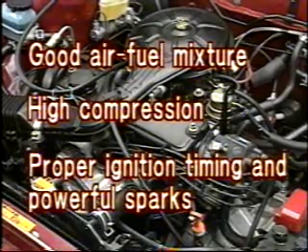Preconditions must be met for a gasoline internal combustion engine to run at maximum efficiency. There must be a good air-fuel mixture, a high level of compression, and an ignition system which has optimal timing and powerful sparks. Optimal ignition timing and powerful spark are the responsibility of the ignition system.

There are various types of ignition systems. In this video, we will mainly use a fully transistorized ignition system to explain the functioning of the ignition system.

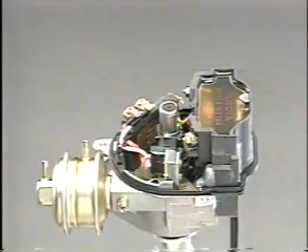In this video: first, the structure of the ignition system. Second, how a high voltage is generated. Third, control of ignition timing. Fourth, spark plugs, which use the high voltage to emit sparks, igniting the air-fuel mixture. Fifth, other ignition systems. And finally, inspection and adjustment of the ignition system.

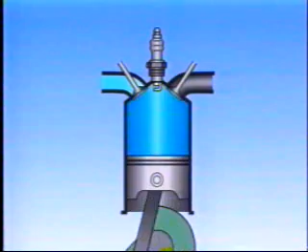In a gas engine, spark plugs ignite the compressed air-fuel mixture and generate combustion, providing power. So the ignition system must be able to produce a high voltage in order to provide optimal ignition timing according to the engine's operating conditions.

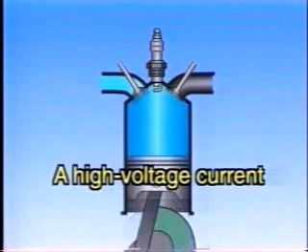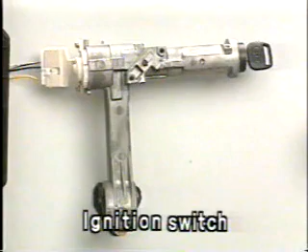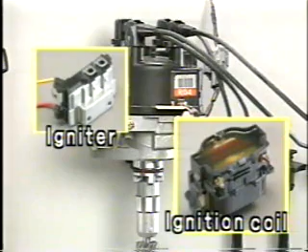First, let's take a look at the components of the ignition system and their function. Electrical power is provided by the 12-volt battery. The ignition switch. The ignition coil and igniter convert the battery's low voltage into a high voltage. This is relayed by the distributor to each cylinder's spark plug.

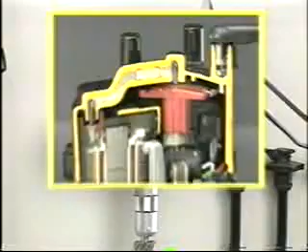This distributor incorporates an advancer device to obtain optimal ignition timing. A distributor with a built-in ignition coil is called an Integrated Ignition Assembly, IIA. The charge from the ignition coil creates a spark at the spark plug, igniting the air-fuel mixture.

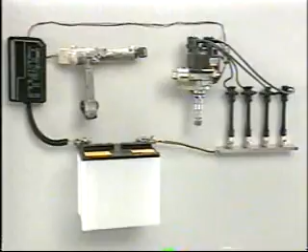Spark plugs require a high voltage of more than 10,000 volts to generate sparks, but as we have seen, the vehicle's only source of electrical power is a 12-volt battery. So how do we generate a high voltage from a 12-volt power source? Let's explain.

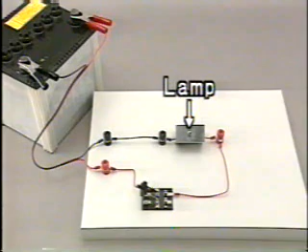Take a look at this experiment. A 100-volt lamp is connected across the battery and the switch is turned on. The voltage is only 12 volts, so the lamp doesn't light.

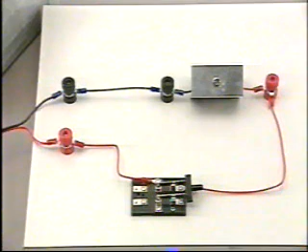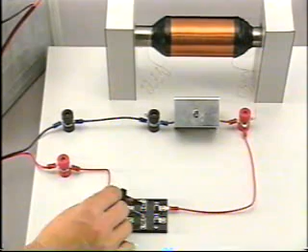Next, a coil is connected across the lamp and the circuit switched on once more. Once again, the lamp fails to light. But at the instant the switch is turned off, the lamp flashes.

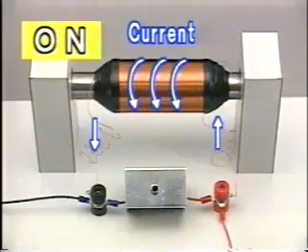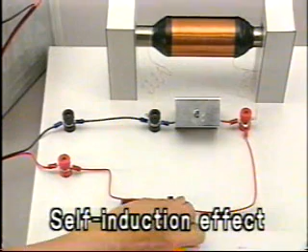Here's why. If the switch is turned off when current is still flowing in the coil, a large electromotive force, EMF, or voltage, is flowing in the opposite direction. This is called the self-induction effect, and the electromotive force generated is called the counter-electromotive force.

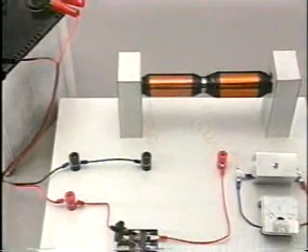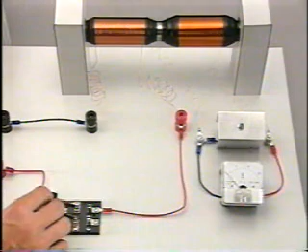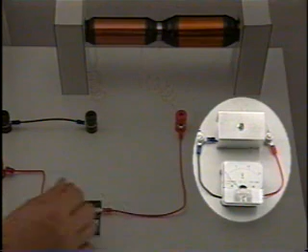When the current is switched on and off in the primary coil, a high voltage is generated in the secondary coil. This is called the mutual induction effect. An ignition coil integrates these two coils into one.

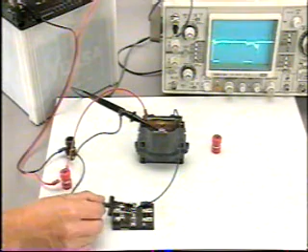Let's conduct a test with an actual ignition coil. The current flowing in the primary coil is turned on and off. As you can see, the ignition coil uses the self-induction and mutual induction effects to generate a high electromotive force of tens of thousands of volts from the 12-volt power source.

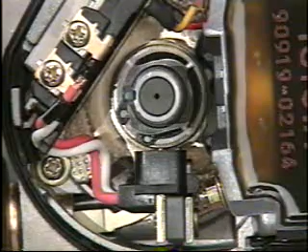Conventional systems use contact breaker points in the distributor to turn the switch on and off mechanically, just like this device. But today, most systems make use of the switching effect of a transistor, or an electronic control unit, or ECU.

Now let's take a close look at how a high voltage is generated using an actual transistorized ignition system. An ignition coil, a signal generator, and an igniter are integrated with the distributor.

In the transistorized ignition system, the ignition signal from the signal generator is transmitted to the transistor in the igniter. This transistor turns the primary current in the ignition coil on and off.

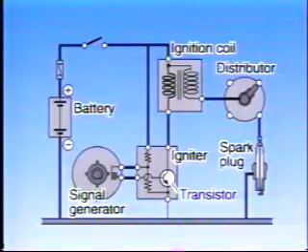The signal generator has three components: a signal rotor, which makes one turn for 2 revolutions of the crankshaft, a pickup coil, and a permanent magnet. The rotor turns clockwise or counterclockwise depending on the engine.

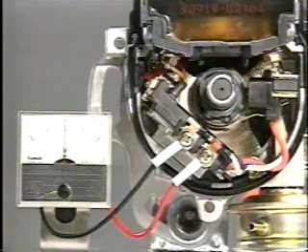As the rotor turns, a voltage is generated in the pickup coil. This is the ignition signal. But why is a voltage generated?

The magnetic flux of the permanent magnet flows through the signal rotor, the pickup coil, the bracket, and returns to the magnet. When the rotor is still, there is no change in the magnetic flux.

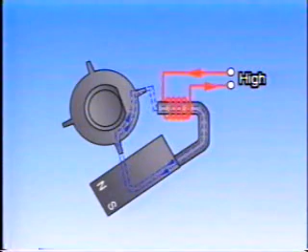When the signal rotor rotates and a rotor tooth approaches the pickup coil, the magnetic flux density increases. As the rotor tooth moves away from the pickup coil, it decreases. This means that the voltage generated in the pickup coil depends on the changes in the magnetic flux.

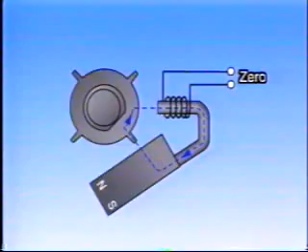The level of EMF generated depends on the relative positions of the rotor and pickup coil. When a rotor tooth approaches the pickup coil, the EMF increases, and when the rotor tooth and the pickup coil face each other, it becomes 0. When they move apart, a counter EMF is generated.

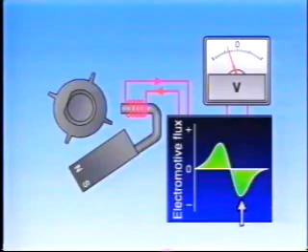These changes in the EMF cause the igniter to switch the primary current on and off. Let's take a look at how the current is turned on and off.

The engine is running and the signal rotor approaches the pickup coil. The voltage is generated in the direction shown in the diagram. The base current flows in the transistor, which switches on, and the primary current flows in the coil.

When the signal rotor's tooth is aligned with the pickup coil, the voltage generated in the pickup coil decreases and the transistor is turned off. This cuts off the primary current and generates a high voltage in the secondary coil.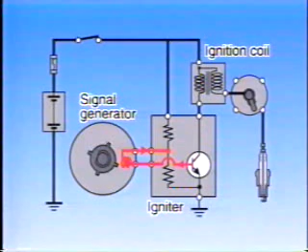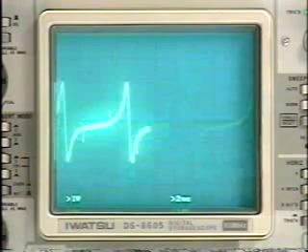The transistor is also turned off when the voltage is generated in the opposite direction in the coil. In this way, when the engine is running, the transistor is turned on and off every time one of the signal rotor's teeth passes the pickup coil. Every time the transistor is turned off, a high voltage is generated in the secondary coil.

The voltage generated in the secondary coil then passes from the distributor's center electrode through the rotor and from the outer electrode to the spark plugs, according to the firing order of each cylinder.

Next, let's take a look at the method used to obtain optimal ignition timing. In general, a gasoline engine achieves maximum efficiency if the combustion pressure in the cylinder reaches maximum when the crank angle is about 10 degrees past top dead center. This means that ignition should be timed accordingly.

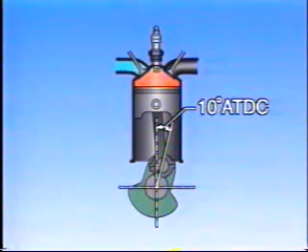This graph shows the process in terms of the pressure changes inside the cylinder. Even if ignition takes place at point 1, combustion doesn't start immediately. Instead, combustion starts at point 2, and compression starts to increase. The compression reaches maximum at point 3, and combustion comes to an end at point 4.

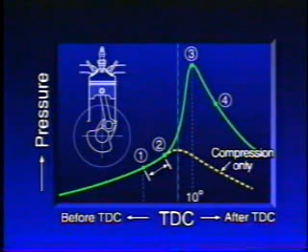The period between 1 and 2 is called the ignition delay time. For a given fuel, this delay is more or less fixed, irrespective of the engine speed. So let's think about what happens if the engine speed increases.

Because the ignition delay time between 1 and 2 is constant, the angle through which the crank rotates in the same period of time increases. The point at which maximum pressure is reached lags behind 10 degrees. So in this case, it is necessary to advance the ignition timing.

If the load on the engine increases, the volume of the air-fuel mixture and the compression pressure inside the cylinder increase. The temperature of the air-fuel mixture goes up, and so the mixture burns faster. As a result, the combustion time gets shorter.

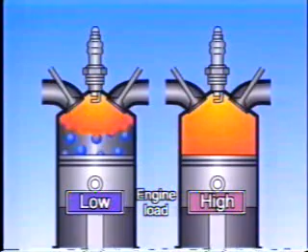This graph shows what happens. In this case, the ignition timing has to be retarded.

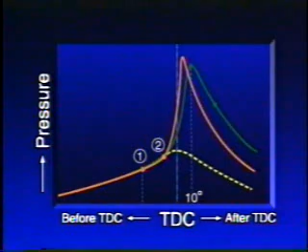It is changed according to the engine speed and driving conditions. This is achieved by altering the ignition advance angle, which is controlled by the advancer incorporated in the distributor.

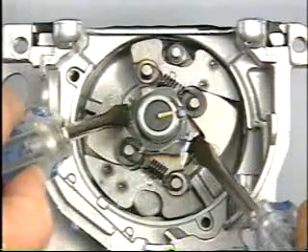Ignition timing is controlled by a governor advancer according to the engine speed and by a vacuum advancer according to the load on the engine. The governor advancer controls the ignition advance angle by rotating the signal rotor slightly relative to the distributor shaft. And the vacuum advancer controls the advance angle by changing the position of the pickup coil.

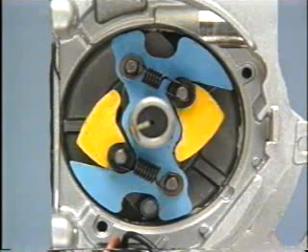Let's take a closer look. The governor advancer consists of a cam plate, flyweights, and governor springs. The cam plate rotates together with the distributor shaft. Two flyweights rotate on the cam plate with support pins as their centers.

At low engine speeds, the flyweights are kept closed by the force of the springs. As the engine speed increases, the flyweights are gradually thrown outward by centrifugal force. Then the cam plate moves the signal rotor in the direction of rotation until the centrifugal force balances the cam spring force. This operation controls the advance angle.

Next, let's take a look at a vacuum advancer. Here, a diaphragm is connected to the pickup coil with an advancer rod. This diaphragm responds to the vacuum in the intake manifold.

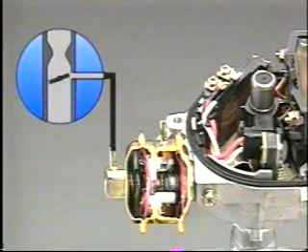When the load on the engine is light, the throttle valve opening is also small, so a vacuum is generated at the diaphragm, pulling the advancer rod, moving the pickup coil to the left, and advancing ignition timing.

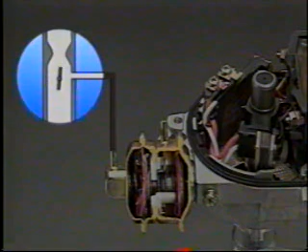When the engine load is heavy, the accelerator pedal is depressed, the throttle valve opens wide, and the vacuum in the intake manifold decreases.

Then the spring pulls the diaphragm to the right. As a result, depending on the engine load, the pickup coil moves in the same direction as the signal rotor rotation, retarding ignition timing.

In automobiles, various types of vacuum advancers are used according to engine specifications. This graph shows the relationship between the intake manifold vacuum and the advance angle.

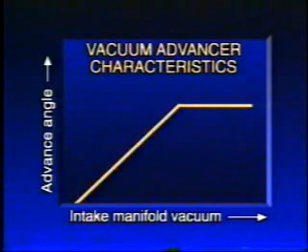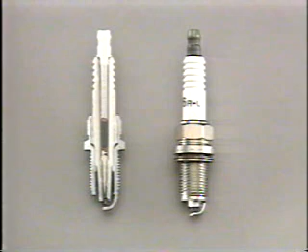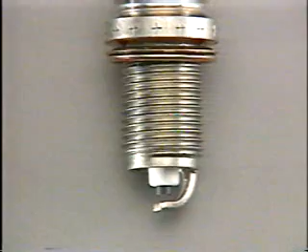The role of the spark plug is to reliably generate strong sparks and thus ignite the air-fuel mixture. The ignition sparks jump between the spark plug's center and earth electrodes. The spark voltage is high or low in proportion to the spark plug gap.

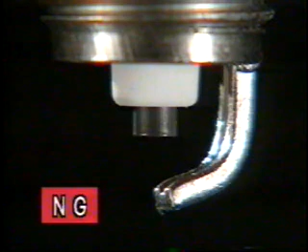Through normal use, the gap will increase, causing the engine to misfire during acceleration. Therefore, the spark plug should be inspected periodically to maintain optimal spark gap.

Let's take a look at electronic spark advance, ESA. Instead of a mechanical advance, an ECU, or electronic control unit, controls ignition timing in this system.

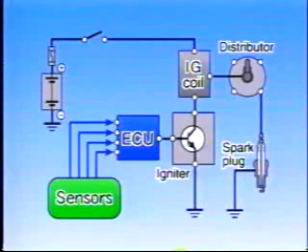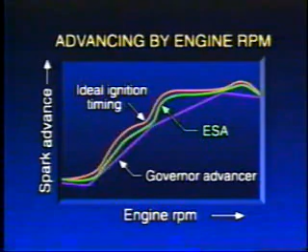This system senses engine conditions based on signals from various sensors. The ECU determines ignition timing and turns the primary current on and off. Conventional mechanical advancers could only control ignition timing in direct proportion to engine speed and manifold vacuum. But using sensors and the ECU, ESA can achieve control closer to the ideal for the engine's running conditions.

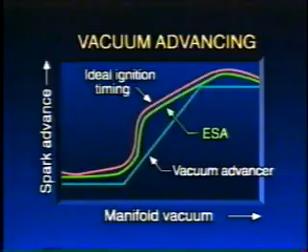In ESA, the distributor has two integrated pickup coils, one of which generates an engine speed, or NE signal, and the other a crank angle position, or G signal. While the engine is running, these signals are continually transmitted to the ECU.

In the case of the D-type EFI engine, other sensors are provided for the ECU, such as the vacuum sensor, throttle position sensor, knock sensor, water temperature sensor, and vehicle speed sensor.

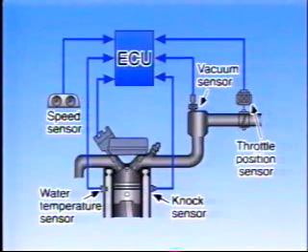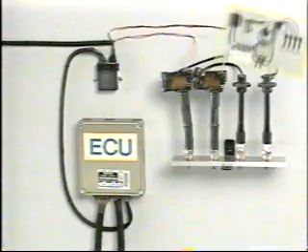Next, let's take a look at a direct ignition system, or DIS. Conventional ESA generated a high voltage with one ignition coil and sent the voltage to each spark plug with the distributor. But a DIS transmits ignition signals to multiple ignition coils and distributes the power from the ignition coil directly to the spark plug.

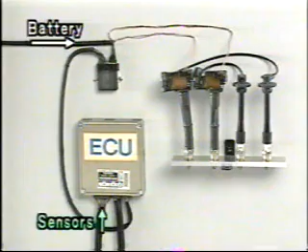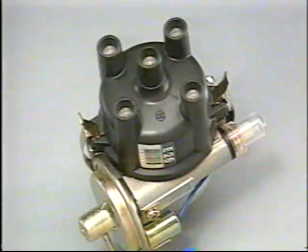Let's have a look at a standard ignition system. Unlike a transistorized ignition system, a standard ignition system turns the primary current of the ignition coil on and off mechanically using the distributor's breaker points.

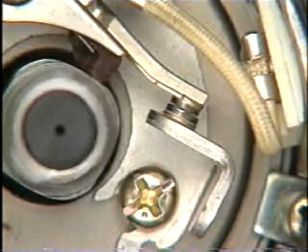The rotation of the cam on the distributor shaft opens and closes the breaker points. This turns the primary current of the ignition coil on and off.

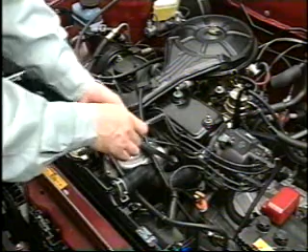Now let's take a brief look at inspection and adjustment methods for the IIA ignition system.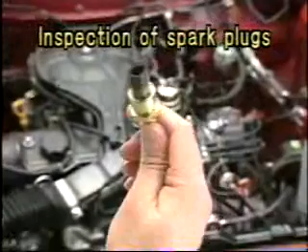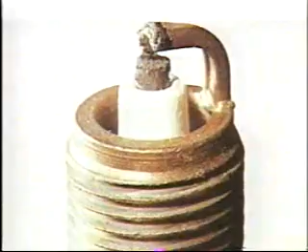You can tell the engine condition from the color and condition of the spark plug's electrodes. A light brown color shows that the engine is in good shape. If the electrodes are black, the air-fuel mixture may be too rich, or the spark plug heat range may be too high. If the electrodes are white, the air-fuel mixture may be too lean, or the electrode heat range may be too low, causing the electrodes to scorch.

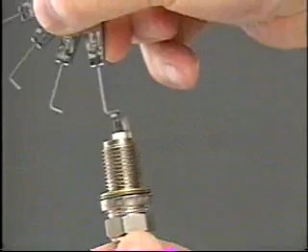Please clean the electrodes with a spark plug cleaner or a wire brush. Next, check with the spark plug gap gauge whether the spark gap is within the correct range. If the gap is out, bend the outer electrode to adjust the gap.

In the case of a platinum-tipped spark plug, the tip of the center electrode and the opposing earth electrode are thinly plated with platinum. In principle, in order to protect the electrodes, they should not be cleaned. But if it becomes necessary to use a spark plug cleaner, for example because of soot, clean the electrodes as quickly as possible. It is not necessary to adjust the gap of a platinum spark plug.

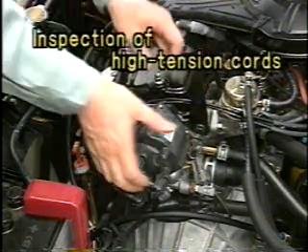Inspection of the high-tension cords. Measure the resistance of the high-tension cords with an ohm meter.

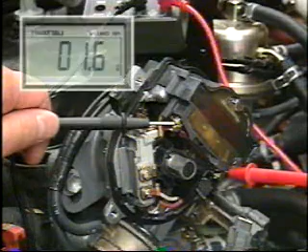Inspection of the ignition coil. Measure the resistance of the primary and secondary coils and check that the resistance is correct.

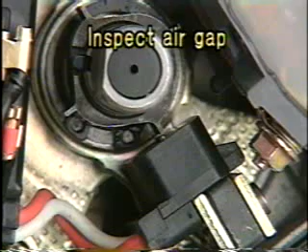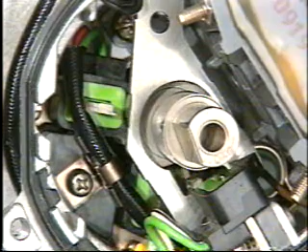Next, measure the resistance of the pickup coil. To inspect the air gap with a non-magnetic feeler gauge, measure the gap between the signal rotor and the pickup coil projection. In the case of ESA, measure the gap between the NE signal pickup coil and the G signal pickup coil. Also measure signal generator resistance.

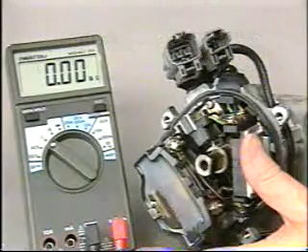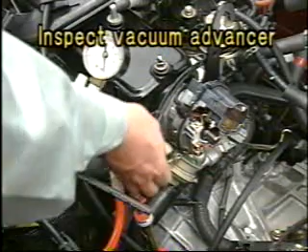To inspect the vacuum advancer, disconnect the vacuum hose and connect a vacuum pump to the diaphragm. Apply a vacuum and check that the vacuum advancer operates correctly.

When inspecting the governor advancer, turn the rotor forward, release it, and check that the rotor quickly rotates backward. And check that the rotor doesn't rattle.

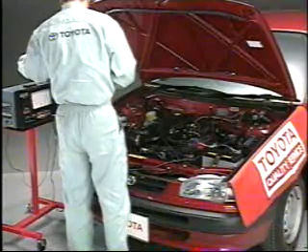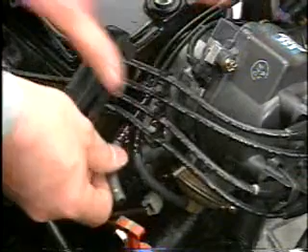Next, inspection of ignition timing. First, connect the tachometer and timing light. Disconnect the vacuum hose from the distributor subdiaphragm and plug the end of the hose. Then set the initial ignition timing.

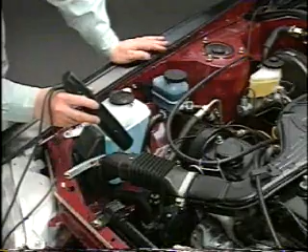With the engine idling as specified, use the timing light to check that the ignition timing is correct. If the engine speed is high at this point, the governor advancer will operate, so be sure to check this with the engine idling. If the ignition timing is incorrect, loosen the distributor bolts and turn the distributor.

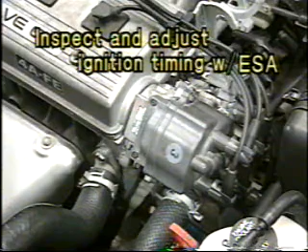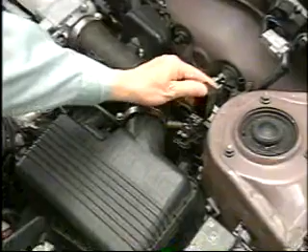ESA has a different inspection procedure. Let's check it out. First, connect the tachometer. Then use the SST to short terminals T or TE1 and E1 of the check connector to prevent the correction angle and set the initial timing.

With the engine idling as specified, check that the ignition timing is correct. Please refer to the repair manual for the reference value.

This video had explained principles, construction, and operation of ignition. The ignition system is essential for the smooth operation of the engine. We hope that this video and the other reference materials will improve your understanding of ignition systems and help you in your everyday work.